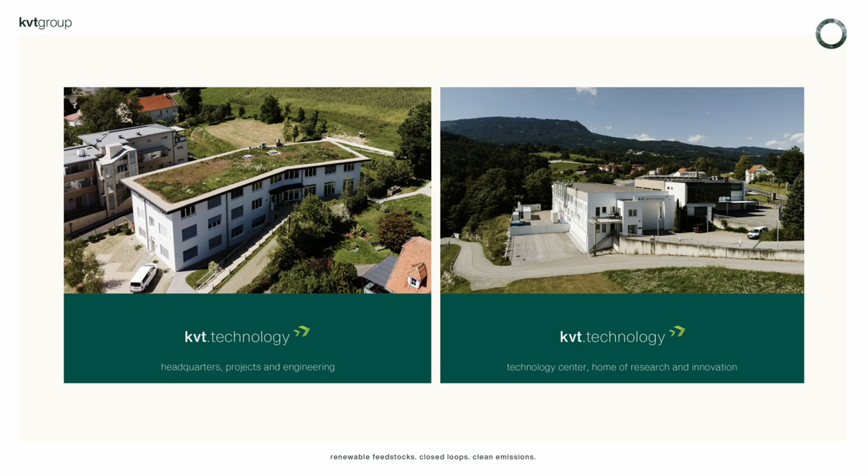On the left side you can see our main office where we execute most of our engineering projects in Austria, and on the right side you can see our R&D center where we are utilizing 2,000 square meters of infrastructure for process development and verifying and testing new applications in the technical field.

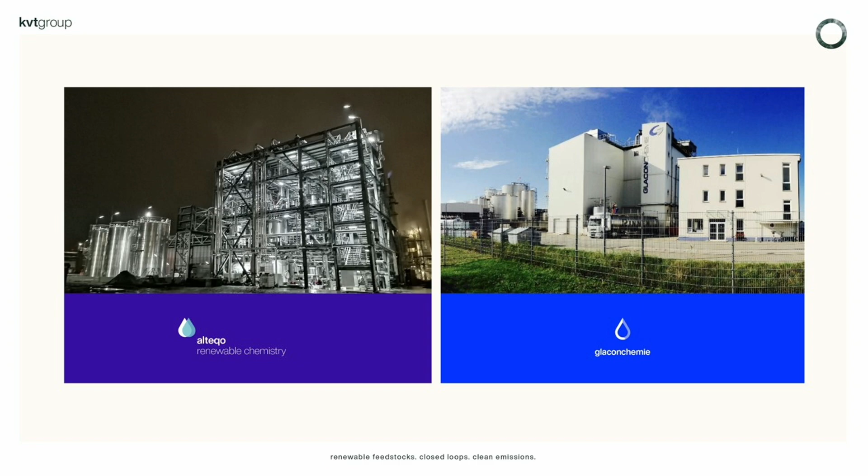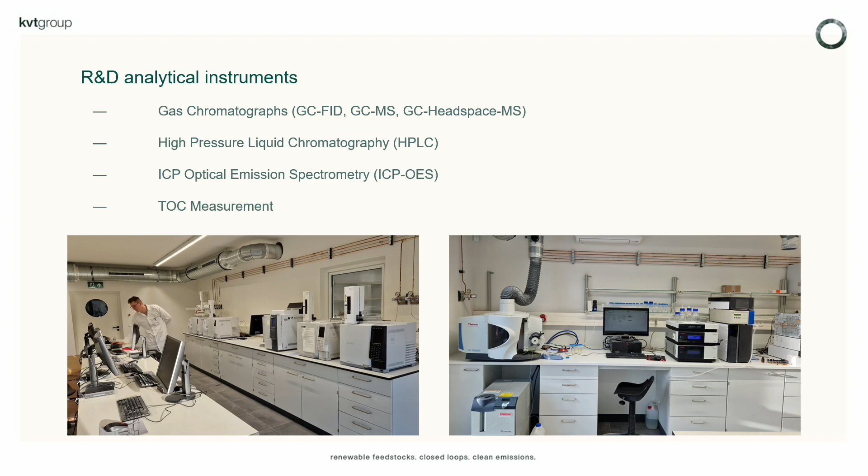Coming more into the topic of today's presentation, I would like to start introducing our R&D facility, because it is the backbone of our group and the backbone of developing new processes and technologies. Introducing just the infrastructure, we have a significant investment in analytical instruments where we can perform most of the tests required to develop our technologies.

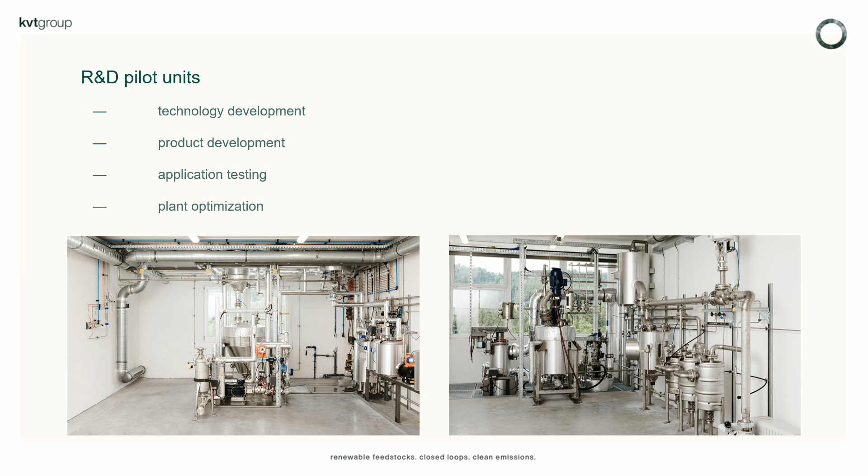And we are especially proud to host 14 chemists to newly develop and verify new technologies, which means that we are always starting in a lab in the milliliter scale to investigate an idea. An idea could be the utilization of a byproduct or a waste stream to solve the problem or to regenerate valuable resources out of these streams. And after the milliliter scale and liter scale, we are typically going into the pilot scale, also in our own R&D infrastructure, which means we can perform 50 to 100, 200 liter scale pilot tests.

What is our main focus? Our main focus is in 2 aspects. One is the industrial environmental protection area, where we are looking actively for waste streams not being able to be treated with conventional technologies. And the other one is to utilize renewable feedstocks, biomass, byproducts for the production of bio-based chemicals. These feed streams could be vegetable oil, other waste oils, but also sugar, starch, or lignin-based and cellulose products.

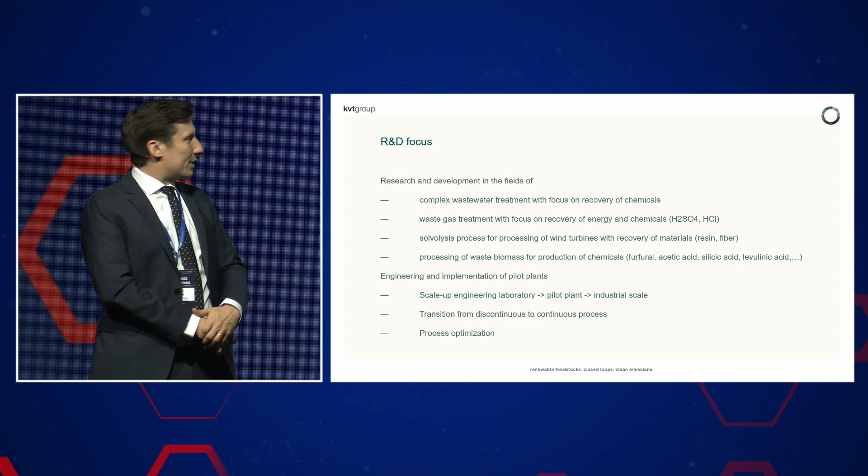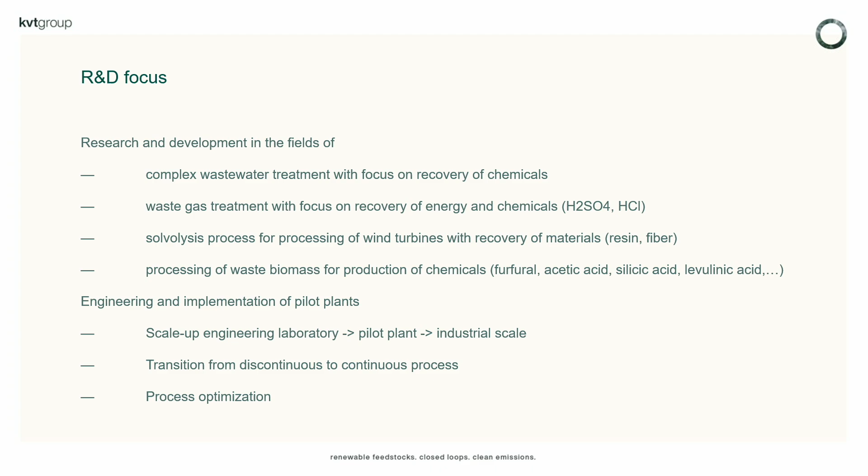Showing some examples, we have started to be engaged in liquid extraction processes for recovering valuable raw materials and chemicals. We are working intensively on sulfuric acid recovery processes. We are dealing with solvolysis. Our current R&D topic is to work with used turbines from wind energy production to recover resin or fiber material. But we are also actively looking at the processing of biomass and recovery of, for example, furfural and acetic acid.

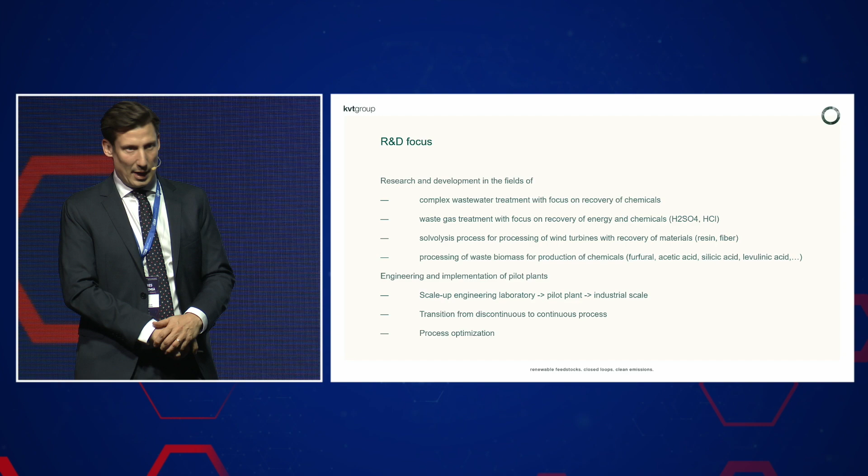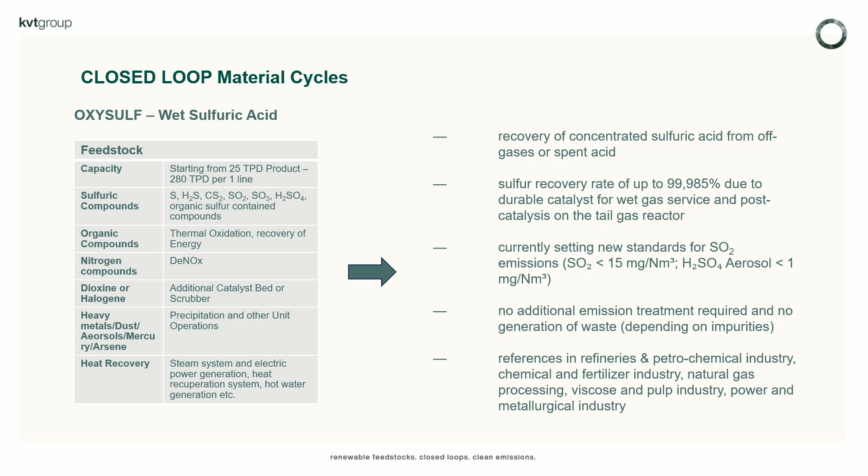Being more specific, I would like to introduce 2 closed-loop concepts we are applying. One is our so-called OXYSULF technology, where we are working with sulfur-bearing off-gases, spent acids, or other waste streams containing H2S, CS2, or other. And we are looking actively to recover energy and sulfuric acid as a valuable product. These processes are mostly related to the metallurgical industry, but also to the refinery industry, the viscose fiber industry, and also other industries like the power industry.

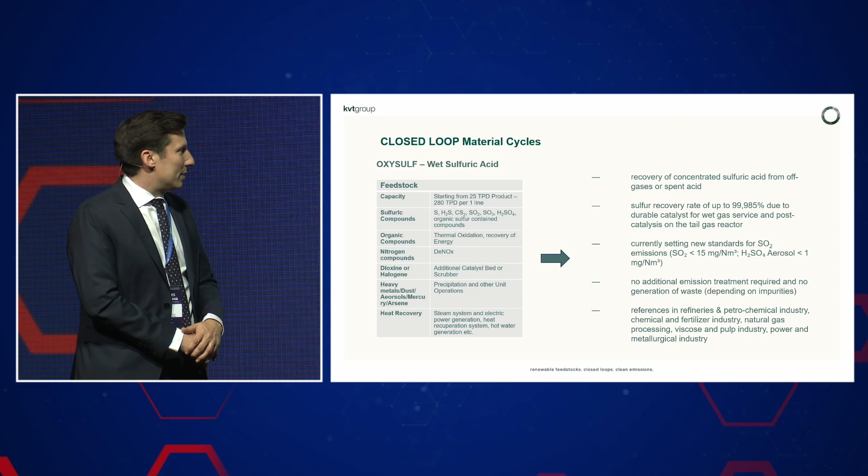We have currently managed to set a new standard for SO2 emissions. We have worked according to European standards. Most of them for sulfuric acid plants apply an SO2 stack emission limit of 100 milligram per norm cubic meter, and we can achieve lower than 15 milligram without an additional scrubber system or generating a waste stream, as we only produce weak acid which can afterwards be recycled.

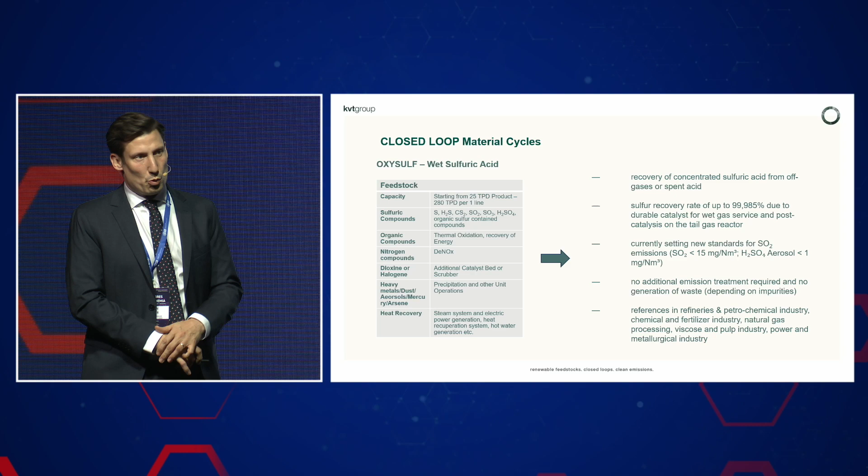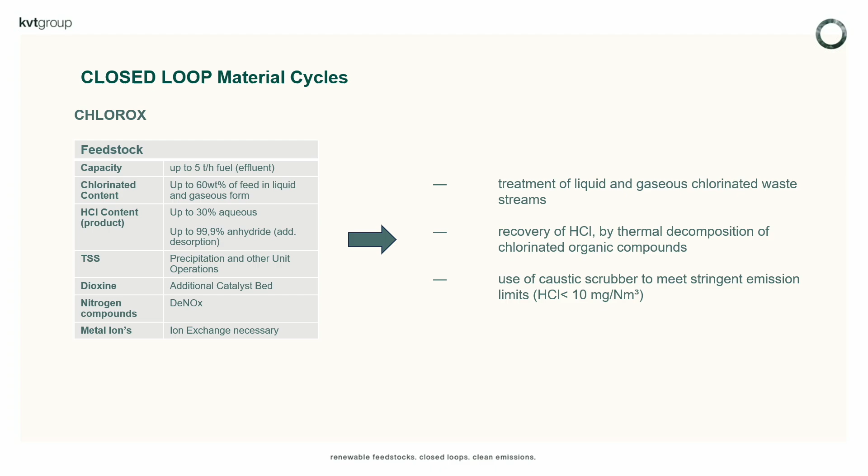We have also applied our so-called Chlorox technology, dealing with chlorinated waste streams with the same purpose, recovering energy, but in this case hydrochloric acid as a byproduct, while cleaning emissions and getting rid of the waste stream. This has been applied to close to all PVC or other related chlorine industry products, and is still an ongoing business field of KVT.

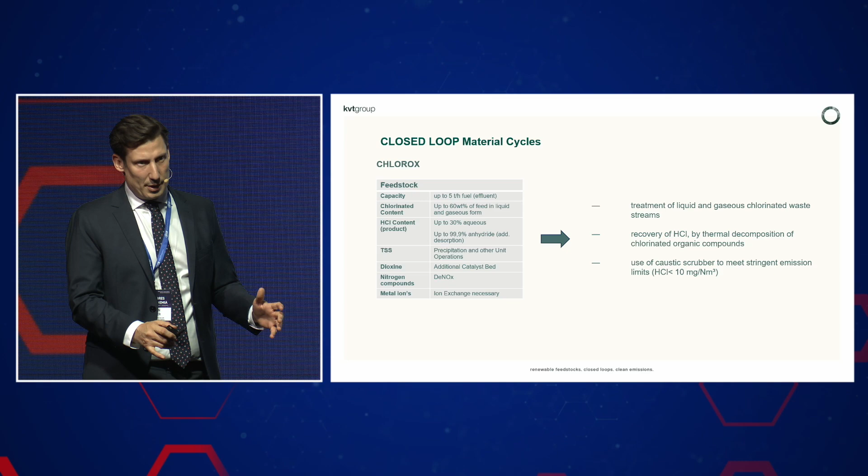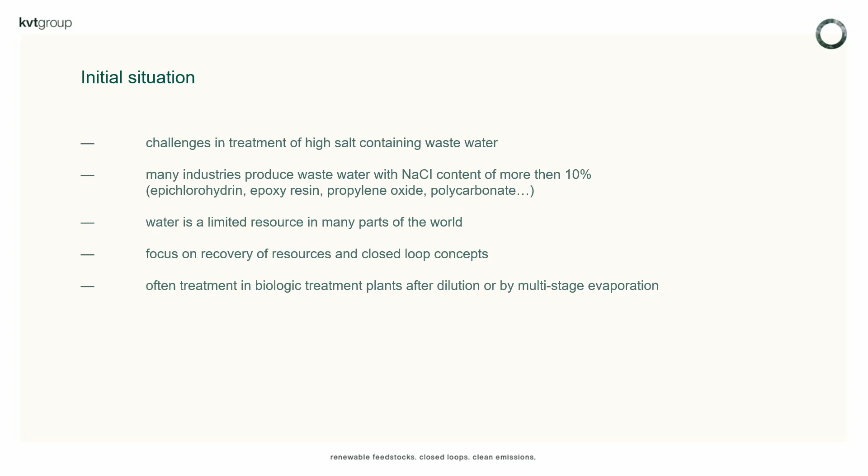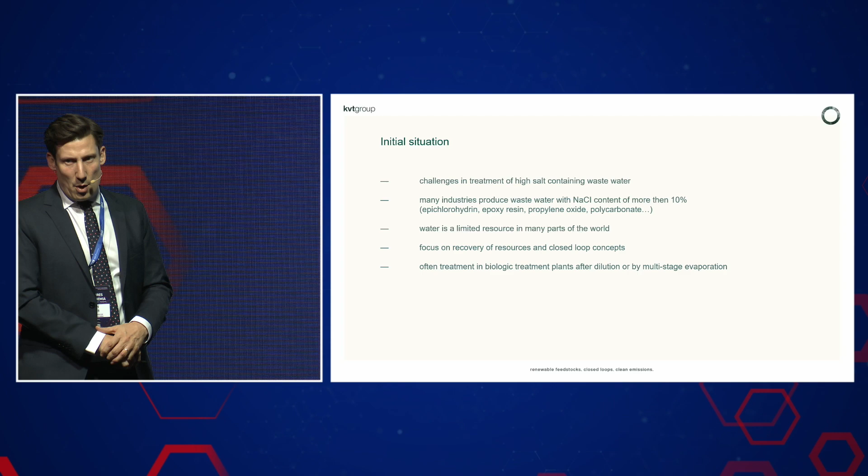I would like to point out in a small case study a new topic we have introduced. We have been working for 10 years on this topic, but we would like to explain our history in this development. In our own development of the ECH process we came across a wastewater with high salt concentration. In the case of ECH, the concentration is around 19% sodium chloride. And we have realized that many other industries are also producing a wastewater with a high salt content where no standard treatment solution is available.

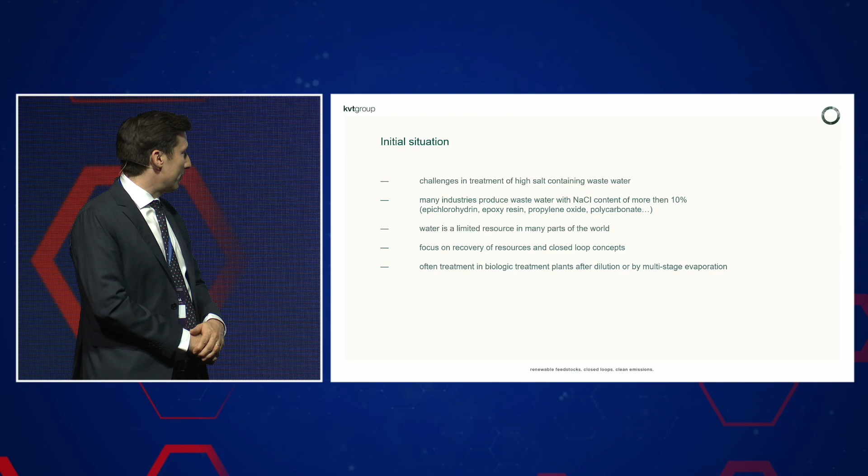We also have to admit and realize that water is a limited resource in many areas of the world, and the recovery and the purification must have highest priority. And applying closed loop concepts and also recovering resources from waste streams is a target. So what was the initial situation? In our technology for ECH, we are generating around 5 to 35 cubic meters of wastewater per hour with high salt content, and TOC up to 8,000 ppm.

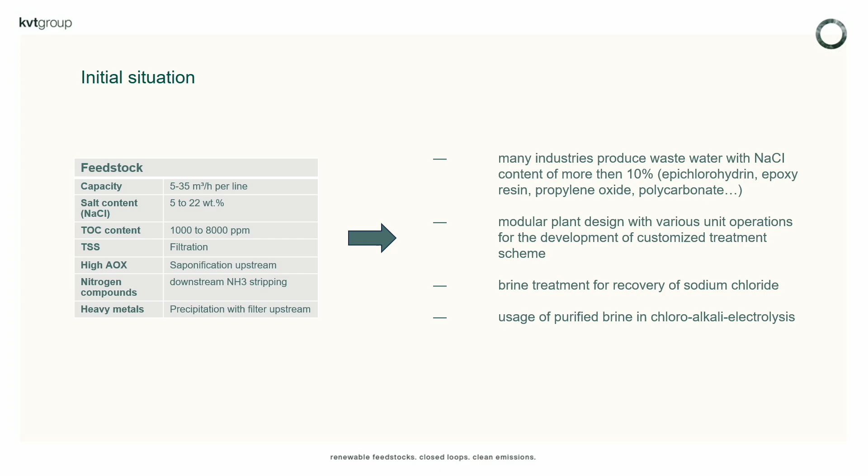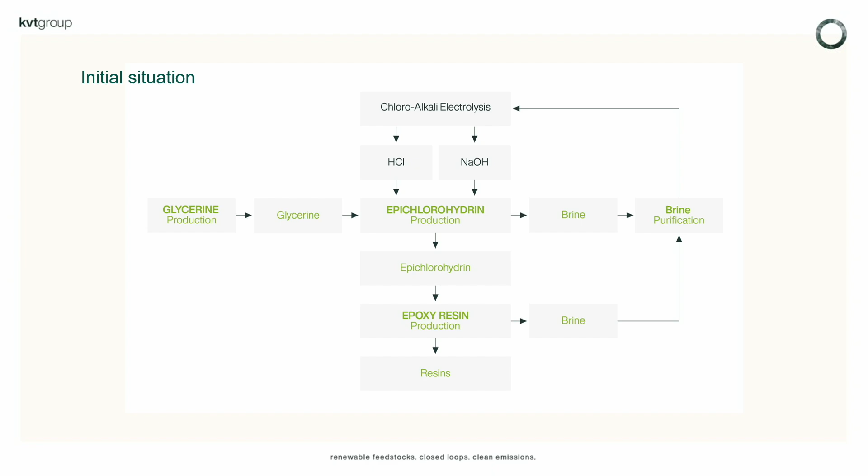This displays a significant challenge, which led us to investigate a modular plant system with the purpose of applying a closed loop concept. Typically epichlorohydrin or epoxy resin production is closely linked to chloralkali plants. In the chloralkali plant, chlorine and caustic soda are produced.

Caustic soda is mainly used in the epichlorohydrin process for saponification, but firstly, with the chlorine, glycerin is chlorinated with HCl gas to produce dichlorhydrin, which is afterwards used in the saponification, and a brine is generated. So sodium chloride at 19% weight is generated together with organic impurities. Similarly, in the epoxy resin process, such a waste brine is also produced.

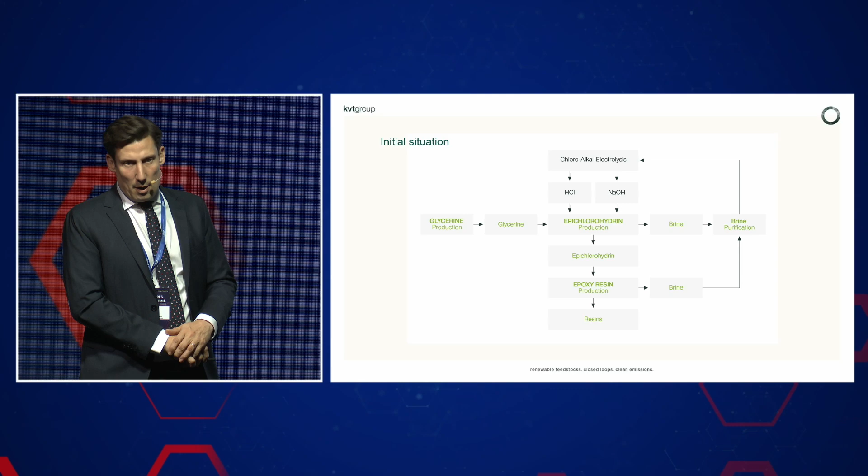So our effort was made in that aspect: we thought, okay, we cannot develop a production process which leaves an environmental problem. So our first target was to purify the wastewater, but as we are close to a chloralkali plant, and we don't want to discharge the sodium chloride content, our biggest aim is to purify this wastewater and recycle it to the chloralkali plant. The electrolyzer process has very strict requirements on organics, but also on heavy metals and other impurities.

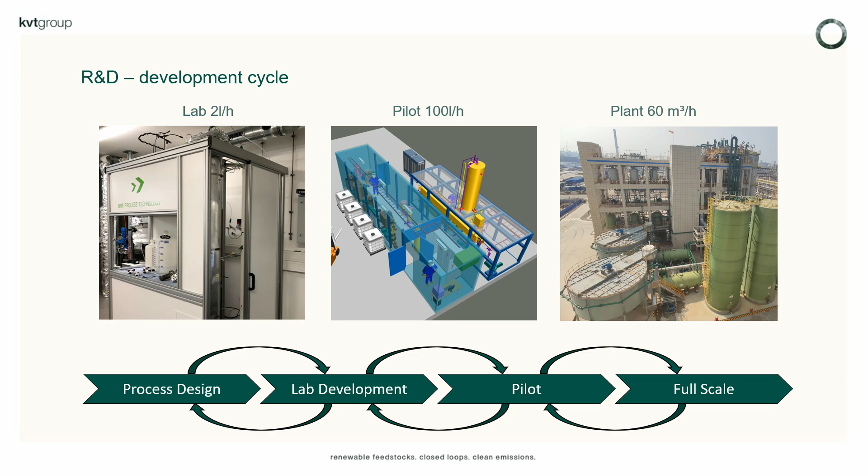And therefore, we started a development cycle, starting from the lab in the milliliter scale, then going to the small-scale pilot plant with 2 liters per hour, implementing a 100-liter pilot unit, and the 60 cubic meter industrial plant, over a time span of approximately 8 years, with many iterations between the different types and sizes of plants going back and forth in the development, with the result that we are now specialized in the business of waste salt and brine treatment.

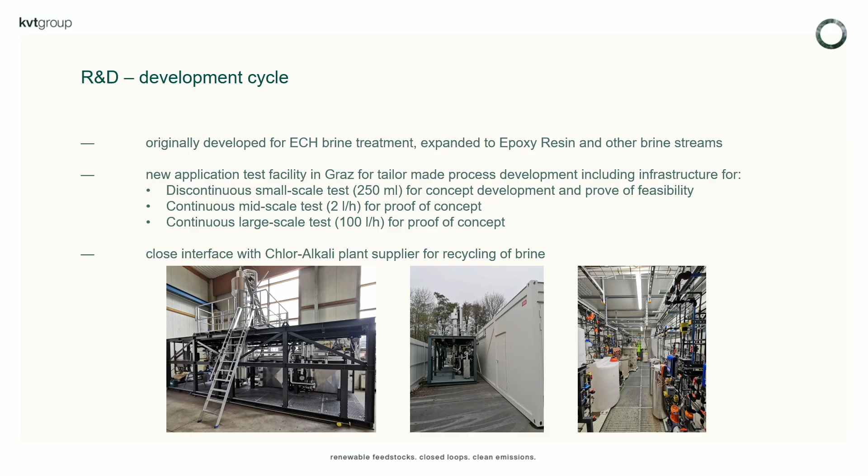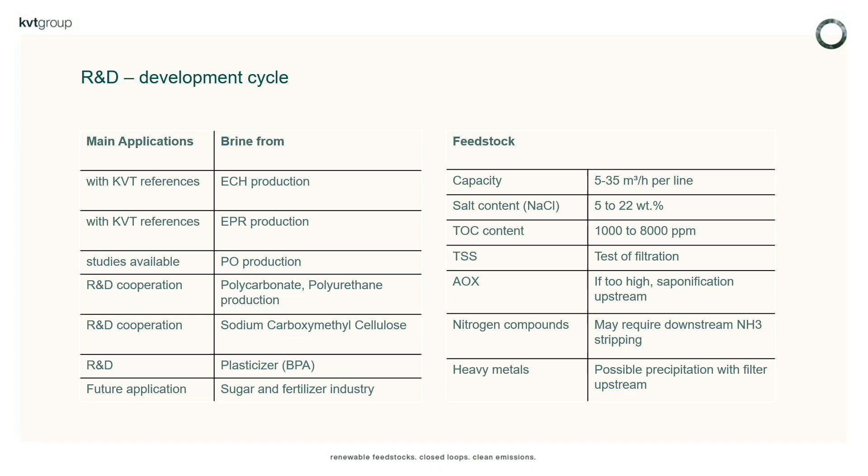And we now have an infrastructure starting with tailor-made brine treatment solutions of 250 milliliters in a batch autoclave, and we are offering the possibility of a 2-liter proof of concept scale and a 100-liter proof of concept scale. Having solved the problem for ECH and epoxy resin, we are also looking into other waste streams coming from PO production, PC production, polyurethane production, and others like CMC. And we are still exploring new fields of brine treatment and respective applications, always with the target to recover the salt for further utilization in the chlor-alkali plant.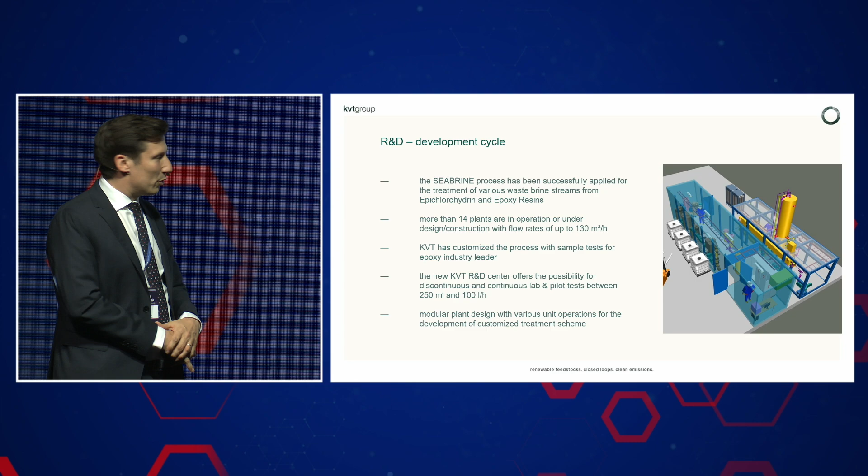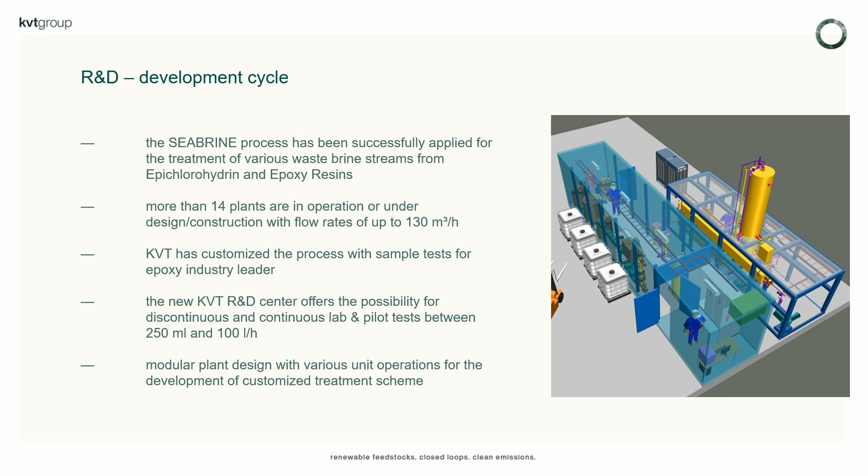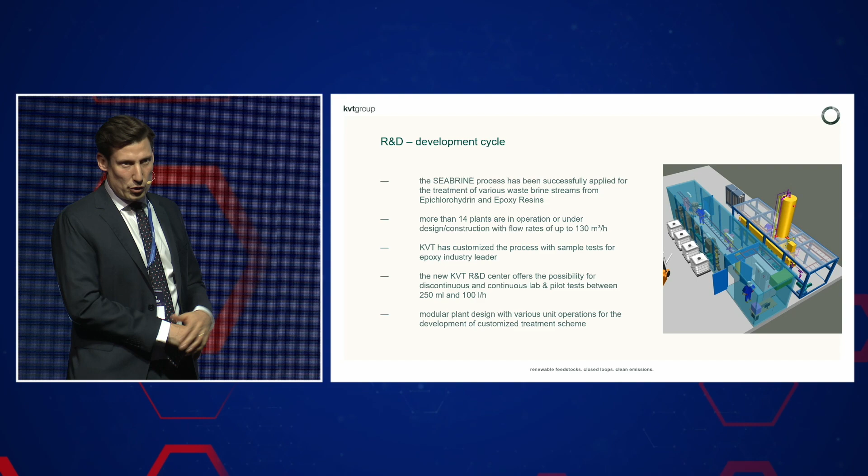So, as a summary, our process has been proven in applications in ECH and epoxy. And by now we were able to implement 14 such units, either currently under operation or in the design stage. But what we would like to showcase is not that we are a successful company managing to get 14 contracts; it should motivate you to look into waste streams which at first look are very challenging, but on the other hand can be a business perspective for the producer of the wastewater and also for the company working in the technology field. So we can conclude that there is a solution for challenging wastewater like a brine, and this solution can also be economically feasible.

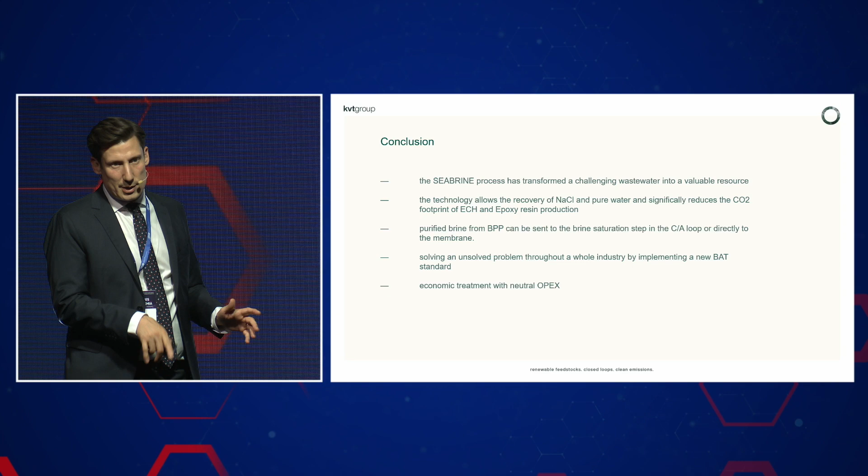At least for ECH and epoxy resin, we know that we have high CAPEX to implement the unit. We are OPEX neutral with the salt costs and the recovery, especially with the recycling of the purified water and the CO2 emission reduction from not needing to bring fresh salt from a salt mine or from the sea to a chlor-alkali plant, because it is a 100% closed loop from the recovery of the purified salt.

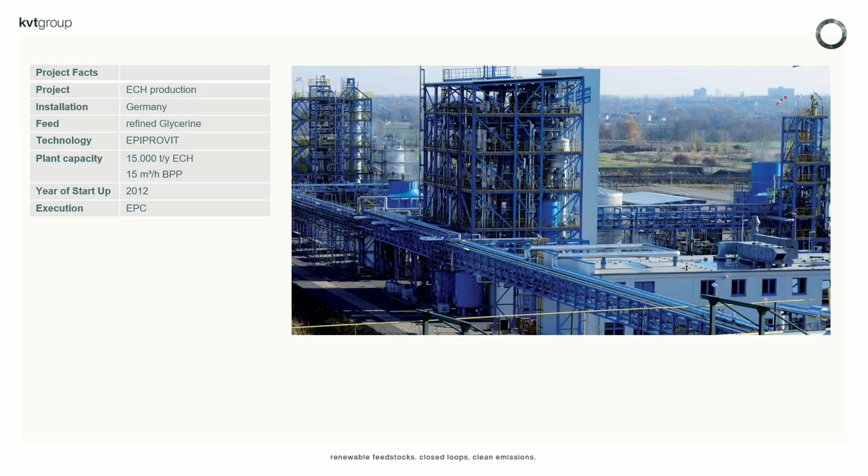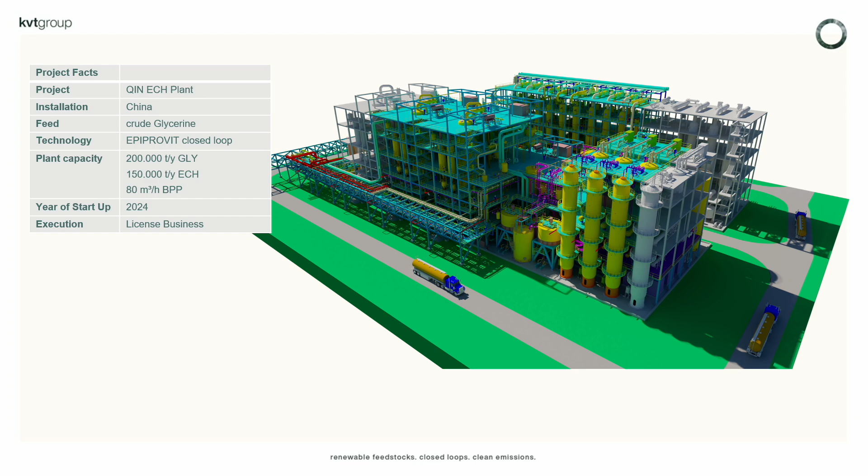To show that this has been implemented, we would like to take you along our journey with a few impressions at the end of our presentation. The first unit we built is located in Germany. For an existing epoxy resin producer, we installed an ECH production unit and combined it with a brine treatment unit and the recycling to the chlor-alkali plant. We could scale up both technologies to a project in China where 10 times the ECH production is applied, for 150,000 tons, and it also purifies 80 cubic meters of wastewater, which is 100% of the feed stream of the sodium chloride plant.

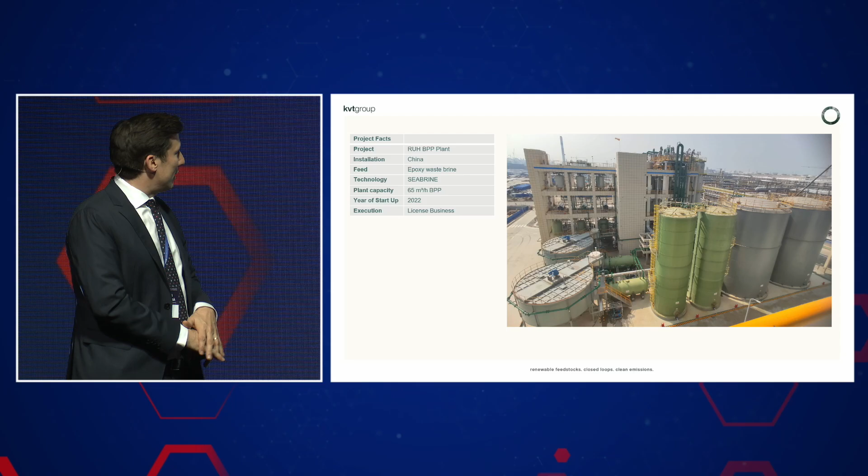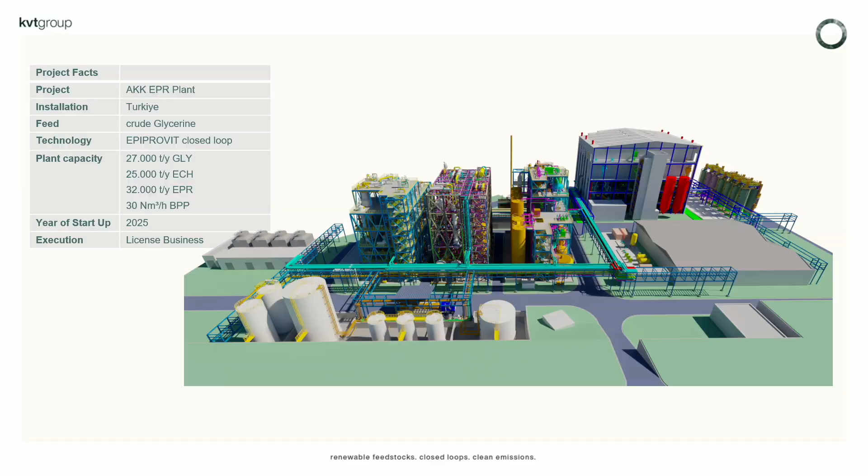And we have also implemented standalone epoxy resin production in China for 65 cubic meters of wastewater. And currently we are working on a 100% closed loop project, which is about to be completed, where an existing chlor-alkali plant is revamped with a full epoxy resin production facility, starting from crude glycerin distillation as feedstock for epichlorohydrin production, with the epichlorohydrin production supplying the main feedstock ECH for epoxy production, and the waste brine purification is the 100% feed for the chlor-alkali plant.